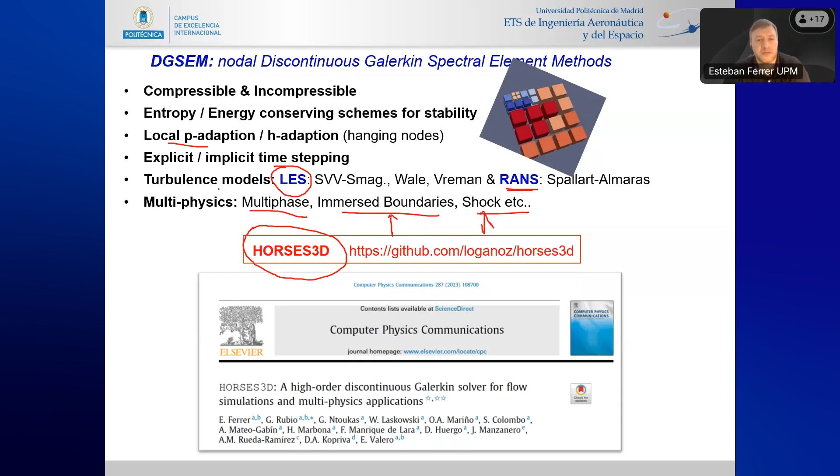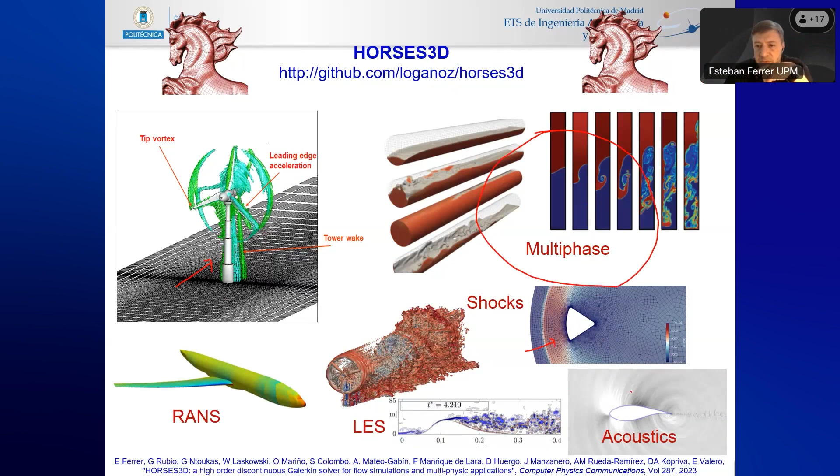Right, so in a nutshell, we can solve all this variety of problems, where here we have a wind turbine with immersed boundaries, I will talk a little bit about that later. We can do multiphase, but I'm not talking about that. We can do shocks, as in this Apollo capsule. We can do acoustics, very interesting acoustics these days, and in particular acoustics of wind turbines. Right, so I'll talk a little bit about that.

First, I will motivate the use of high-order methods. So in low-order methods, classic low-order methods, what you have is a mesh made here of triangles, for example, and then you will have a piecewise constant function inside the element to capture the solution. In finite elements, instead of a constant, you have a piecewise linear variation similar to that one inside each element, and that allows you to capture the solution. If you want to increase the resolution, you need to increase the number of elements to capture the gradient in the solution.

Now, in higher-order methods, and in particular in discontinuous Galerkin, we can do two things. We can increase the number of elements as in lower-order methods, the same idea—that's what we call h-refinement. Or what we can do is fix the mesh, fix the number of triangles, the number of quadrilaterals, and increase the polynomial order inside each element. So instead of using piecewise constant values or piecewise linear variations, we can use quadratic or cubic variations, or any arbitrary polynomial order inside each element. And this allows you to better capture the solution whilst keeping the same number of triangles. Now, one wonders why do one or the other, right?

Because if you increase the number of triangles or you increase the polynomial, what you're doing is better capturing the solution. I think everything can be seen in this very simple problem. This is a Poisson equation, so an elliptic problem. We have here the L2 error, since we know the exact solution, we can compute the error between our numerical solution and the exact solution. And here we have the number of degrees of freedom used to solve the problem, which relates to the size of the matrix we need to invert to get the solution.

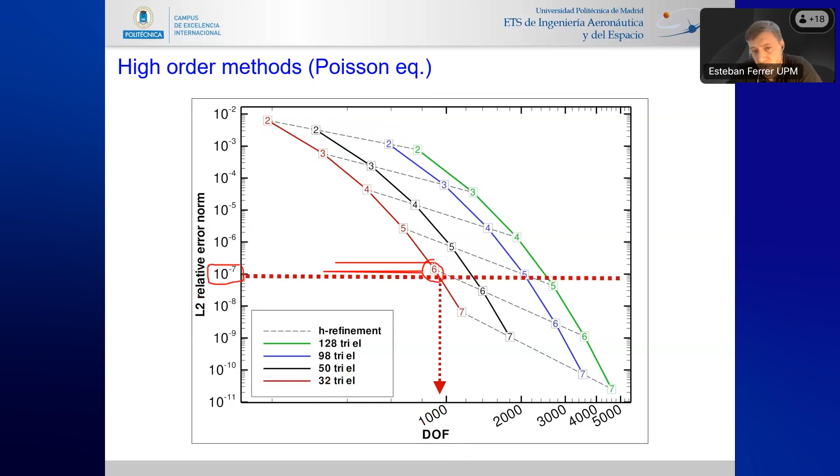So basically what we're saying is that if we are interested in a particular level of accuracy, let's say 10 to the minus 7, we can use a polynomial order 6 on a coarse mesh, and that leads to 1,000 degrees of freedom - that's the size of the matrix we need to invert - as opposed to if we use a low polynomial order, we are outside the screen, meaning a much larger matrix that we need to invert. Overall, there is a saving in memory and cost because we need to invert a smaller matrix for the same accuracy. That's the potential of higher order methods - it can be explained in this simple problem.

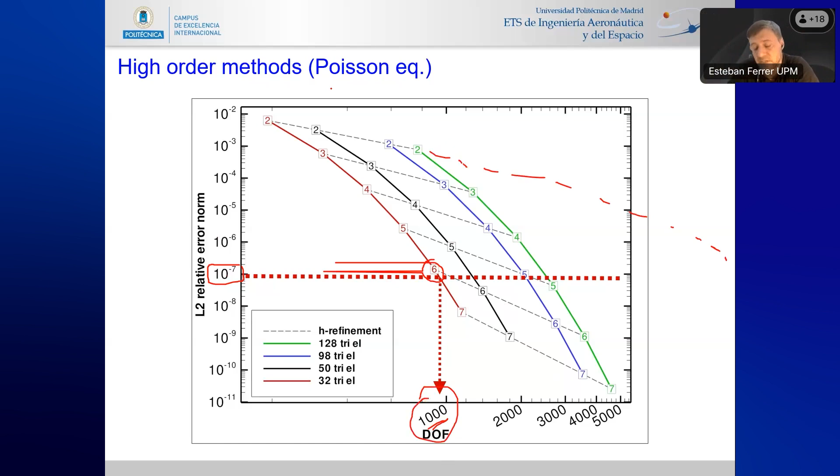Again, this is a Poisson equation, a very simple problem. So what happens if we go to more complex stuff? If we compare, for example, a higher order method, P5, on a very coarse mesh like this one, we see that we capture well the structure of the flow after an airfoil in this case. However, if we use a lower order solver - this is a finite volume solver, in particular Fluent - we see that we get dissipated structures very soon after the vortex shedding starts. This is due to numerical errors, and these relate to the lower accuracy for the low order solver. And this is on a much finer mesh than for the higher order solver.

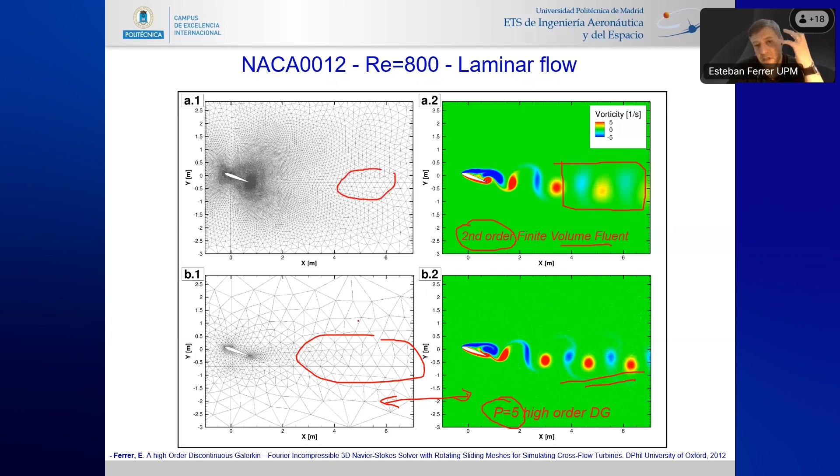So overall, when we go to practical applications, we do see the effect of this improved accuracy for high order polynomials. I have another example, which is even more complicated, and this is the acoustics emanating from the trailing edge of this airfoil. The acoustics in this case is complicated - you have to very well capture the boundary layer and the vortex shedding emanating here at the trailing edge. Those vortices interact with the shear layer here at the trailing edge, and there are some waves emanating and going up to the front.

So what we're measuring here is the acoustic pressure at this particular point. We need to well resolve the near boundary layer and also all the propagation of these waves throughout the space up to this point. If we do that and increase the polynomial order, what we see is what looks like a random signal. We're not sure if increasing the polynomial really makes sense.

But what we can do is take this signal and integrate it from 0 to 20, and then we can get an integrated value for the overall sound pressure level against the degrees of freedom. And what we recover is this very rapid decay of the error, very similar to what we were getting for the analytical elliptic problem, the very simple problem. This is much more complicated - we have generation of noise, we have propagation of noise.

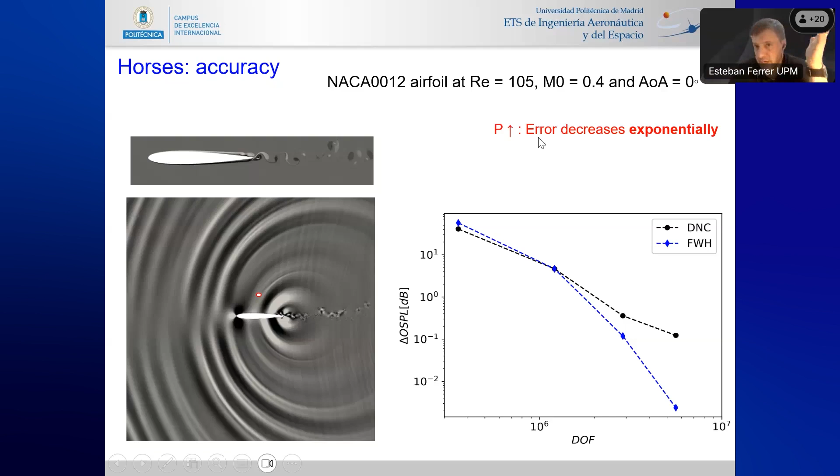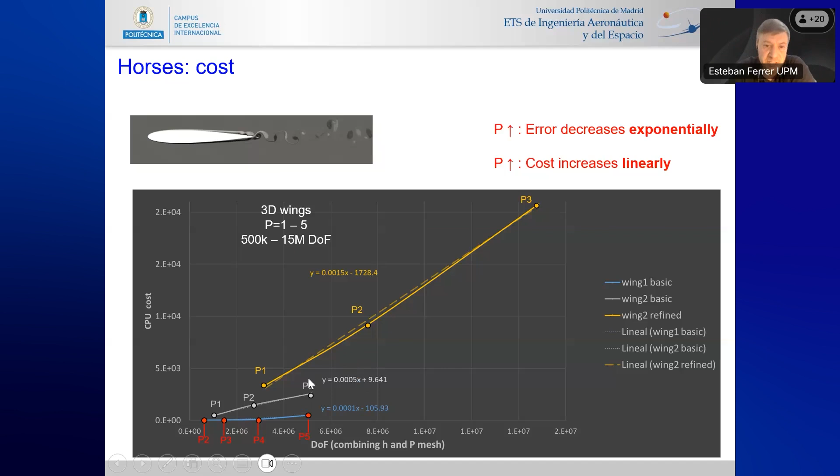Now, we have checked that in our solver. This is parallelized, with a few tricks to improve performance. What we see is that when we increase the polynomial, the cost increases linearly, roughly, not exponentially. So we get exponential decrease in error, but the cost only increases linearly, which makes it very advantageous to use high polynomial orders. So this is what we typically do. We use polynomial order 5, something like that.

Very recently we have ported the solver to GPUs. This is a first, it's on the way. We're trying with OpenACC to port that to GPUs. What we're seeing is that when we compare to 100 CPUs, on one GPU, an NVIDIA A100, not one of the very good ones, we get per iteration a reduced cost of 0.07 seconds.

One can play around with this number and say, okay, for an LES simulation it's not strange to have to run 10 to the 8 times that or something like that, which basically means you get 81 days faster computations with one GPU than with 100 CPUs. So we are happy, and we keep improving this. We have more ideas on how to keep improving this. We're doing it.

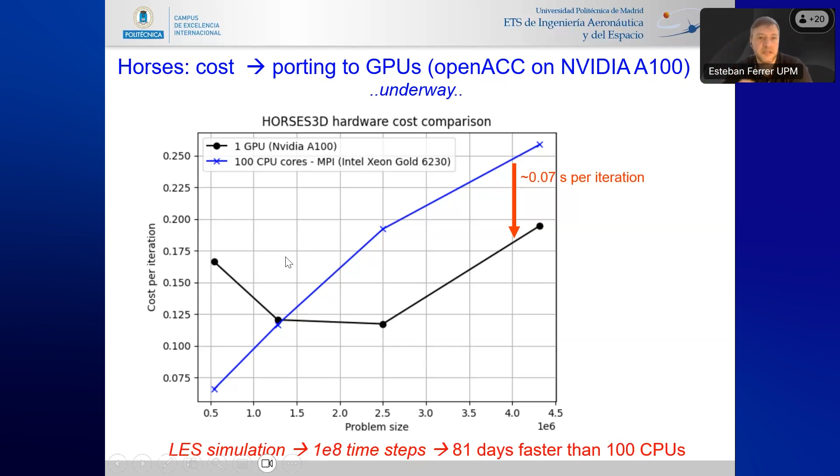We have coupled in the past Horses to MFEM, to other solvers, in particular MFEM. I have here a couple of snapshots of what we've done, to get the conversation going with you guys. One thing we have done in the past is solve the fluid with Horses and solve the thermal part of the problem, which is this capsule Apollo, with MFEM, coupling the two-way coupling of the temperature from one to the other.

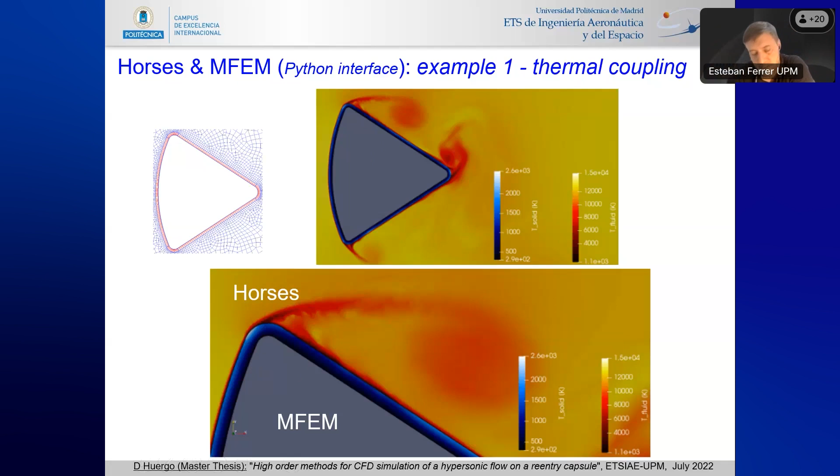A second example of things we have done in the past is solving incompressible flow, so we developed an incompressible solver where we need to solve a Poisson equation and a Helmholtz equation. This is one of the splitting methods to solve the incompressible Navier-Stokes equations. For some parts we use MFEM because we don't have a CG, a continuous Galerkin solver—we only have the DG and flux reconstruction versions. So some parts we use CG with MFEM and some parts we use DG. This we did in a PhD thesis of one of my students a while back.

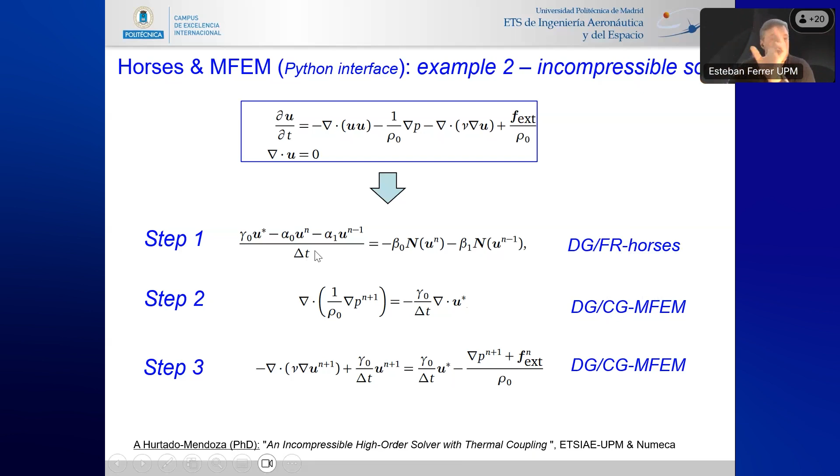So I think we have done that in the past, we know how to do it, and I think that allows us to think of interesting ideas of solving different parts of problems with MFEM or Horses.

Let me go into some of the physics we are developing or including in the solver these days. We're very interested—this is related to an ERC grant that I got recently—in a lot of wind turbine simulations. So we do simulations with immersed boundaries, with actuator lines, and also looking at the interactions of one wake with another, with another wind turbine. All these things are in development now.

If you want to model or simulate wind turbines, there are different ways of doing it. You can use actuator disks, actuator lines, immersed boundaries, and sliding meshes. We are working on all of those. Actuator disks are very easy, just a pressure jump in your simulation, so I'm not going to talk about that—that's too easy. I'm going to talk a little bit about some recent developments on actuator lines, immersed boundaries, and sliding meshes.

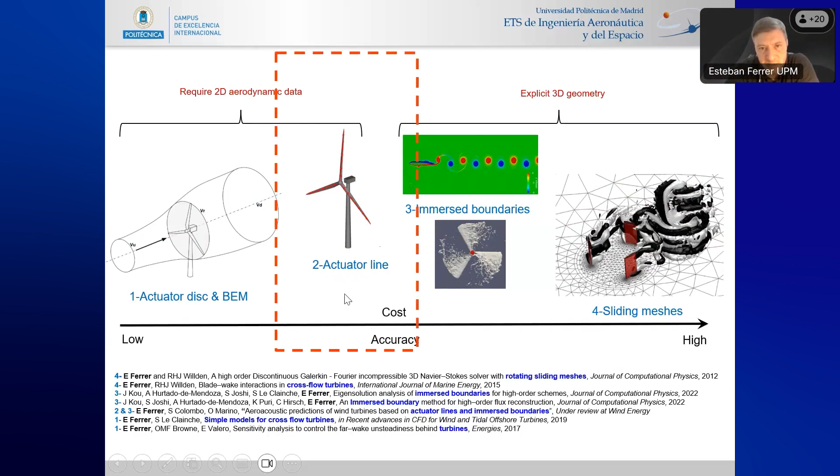Let me start with actuator lines. It's a very neat idea, right? What you do is get a simulation of two-dimensional airfoils, or you can get it from XFOIL or whatever—you only need the lift and drag coefficients on this. Then you get formulas using the velocity in your CFD flow field to calculate the forces, and the forces are calculated for each section of your blade, and then you can add this forcing into your simulation. So you don't need to simulate the whole geometry, you only add a force, a point with a force, with the lift and drag in the direction needed.

What you do is you smooth these forcings to avoid a sudden peak that would blow up the solution. So you use a Gaussian to smear this force, and then you can do the smearing and everything in high order.

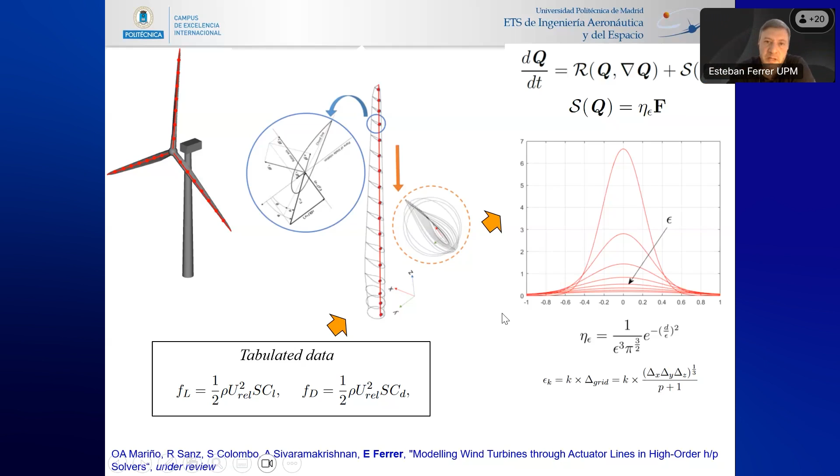Now, of course, these actuator line ideas were all developed for low order methods, for finite volumes in particular. So this is an example of the things you need to think of when you adapt things from low order to higher order. The way this works: you have the lift and drag, you get the u velocity squared, this one here, you take it from the CFD simulation, and with this you compute the overall force.

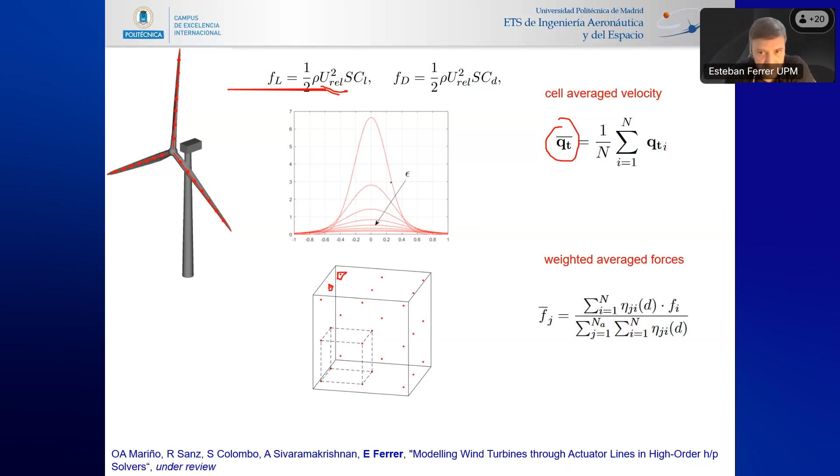We tested both. What we observe is when we do cell averaging or weighted average for low polynomial orders, we get almost exactly the same flow fields—nothing in particular stands out. Of course, that's low order, so it makes sense they're similar. Now, when we go to high order, P5, we see different physics. With the cell averaging, we're changing the physics, getting these long wavelength oscillations that we don't get with the weighted average, and don't get with very fine finite volume simulations. So the message here is one has to be careful when adapting things from low order to high order, because it doesn't always work. Sometimes you have to rethink things.

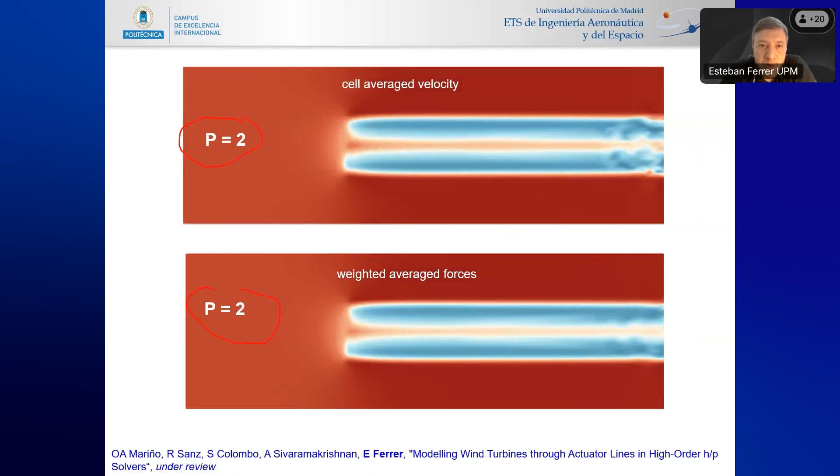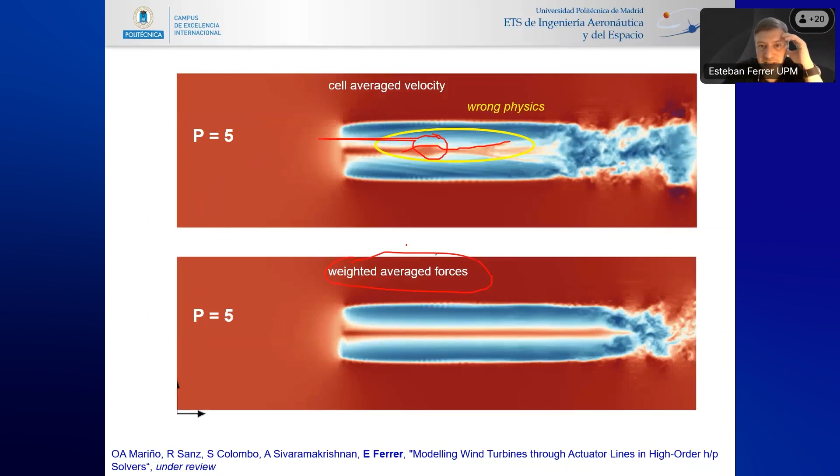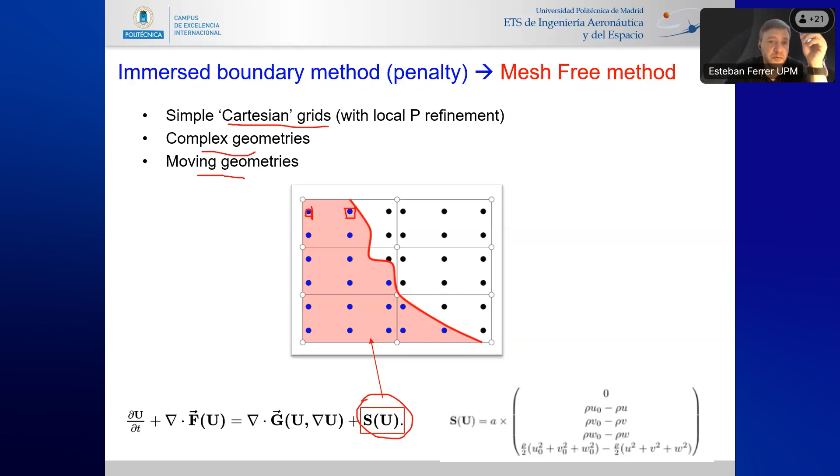So this is one possibility. The second possibility is to use immersed boundaries. What are immersed boundaries? You have a mesh, a Cartesian-like mesh, something very simple, and you modify your Navier-Stokes equations to add a penalization term that drives the u velocity to zero at all the Gauss points inside your body, mimicking the effect of having a body. The nice thing about this is you can use a Cartesian grid—you don't need to body-fit your mesh. You can have complex geometries and moving geometries very easily. And again, from a CFD practitioner's view, no meshing is very nice. I don't think anybody likes meshing.

So, well, this is what we get. We can move things around very easily, and we get quite the right results.

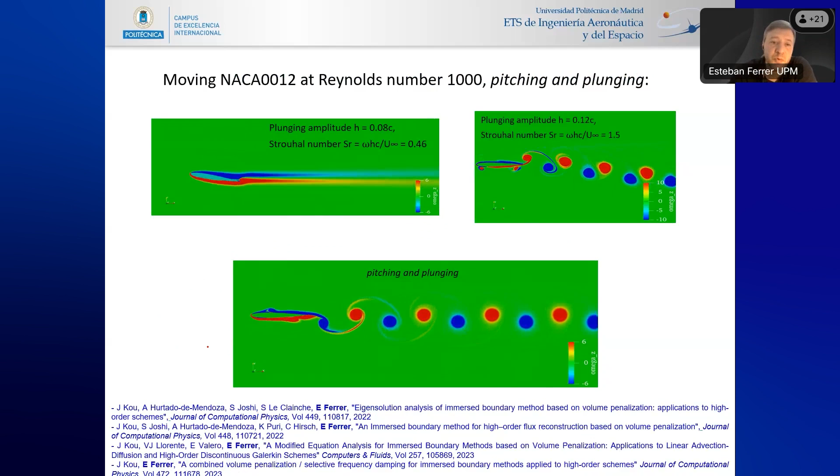For these cases as well, there's a bunch of papers that we developed here a couple of years back, where we analyze the errors and how we can improve the method. One of the interesting things we found is that when you increase the polynomial, you do get better solutions, this kind of exponential convergence, this very rapid decay of the error, which was not obvious because of this way of imposing the boundary conditions. But it can be done.

And we've recently developed a high-order version of the immersed boundary as well, which can achieve this very high convergence.

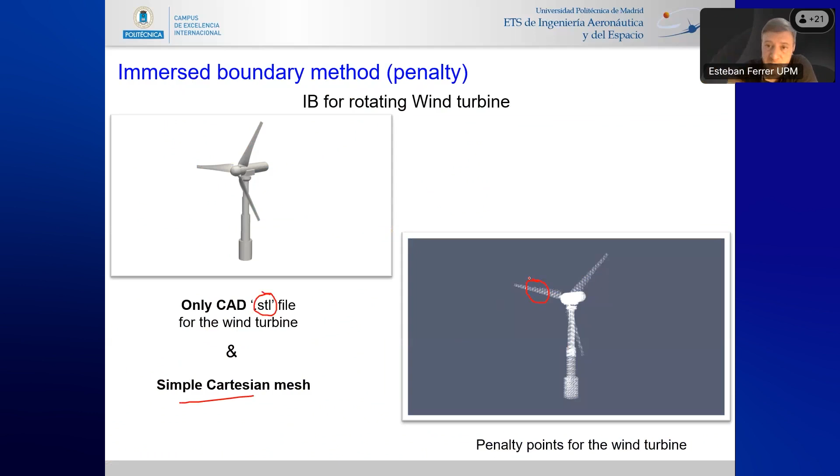Right, so having that, we can do wind turbines as well. For this, we use only the STL and a very simple Cartesian mesh. The solver defines all the points that need to be penalized, all the points inside the body, where you need to add this additional source term. And then we can run this kind of simulation.

Here, for example, in the wake I use a high polynomial order, and in the far field a low polynomial order. What we see is that, of course, there's no solid shown because there's no solid. But we can always overlay the CAD file to see that we're getting things right.

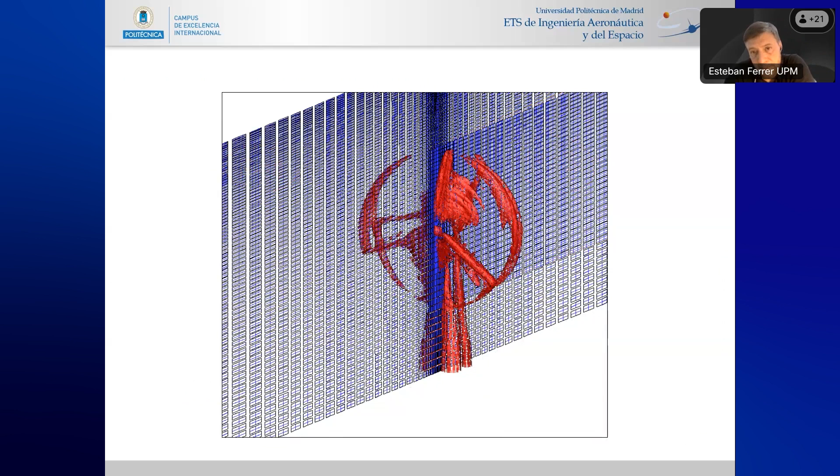So in this case, the blades are rotating, and what we see is that the right physics come through. We get the tip vortex, we get the leading edge acceleration of the blade, we get the tower, we get everything. Typically what we do these days is use actuator lines for the blades because it's cheaper.

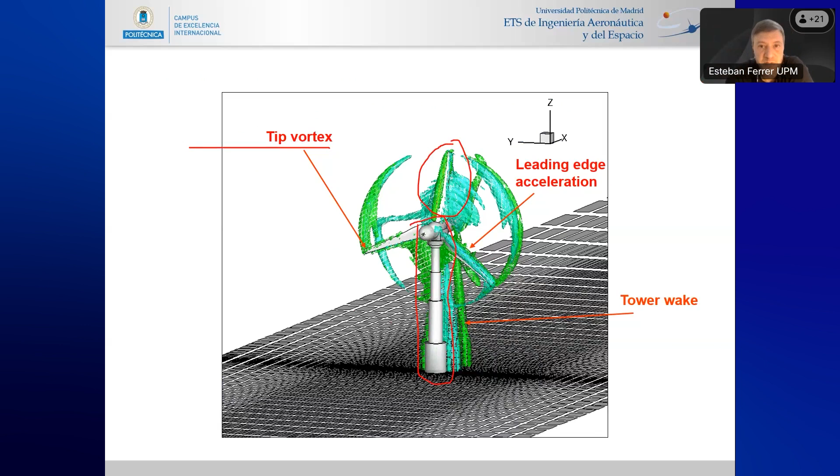And then we use immersed boundaries for all these things. But we also sometimes move things around and get these with immersed boundaries. And finally, the final possibility is to use sliding meshes.

Basically, sliding meshes with high order was part of my PhD back in the days. Here you can see that the inner mesh rotates, the outer mesh is static, and you get a sliding interface. The interesting thing is that the contours go through the interface and they don't care there's any interface, right? They just don't get affected.

There's no spurious oscillations or anything, and you can ensure that by doing over-integration when you have high order methods. This is a bit more costly than the previous ones, but it can be done. We have done it, and we're now implementing it in HORSES3D as well. It's not there yet, but it'll be there soon.

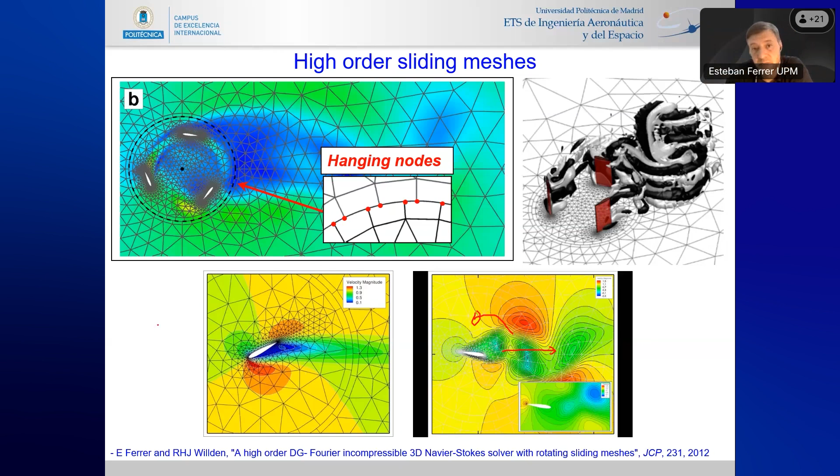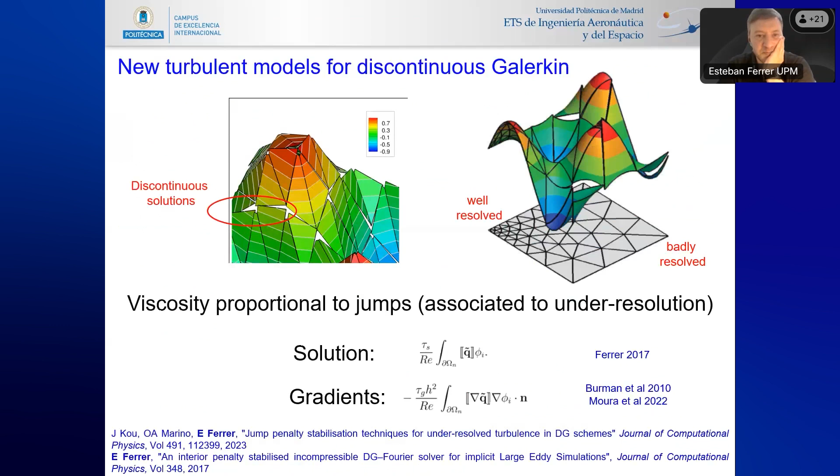I think I'm going to skip a little bit the turbulence part, because otherwise I'm going to run out of time, and I'm going to talk about the machine learning ideas. So let me just skip that part and go into the machine learning.

So things that we're doing in machine learning, we're trying to couple what I call AI-based CFD. The idea is to get some of the features of AI and try to improve the CFD simulation. We've been thinking, and we believe there are three things that can be improved: the efficiency of the solvers, the accuracy, and also automation of the CFD.

So for automation, David is going to be talking about reinforcement learning. We can automate some of the things we typically do by hand with CFD. Efficiency and accuracy, I'm going to be talking about a little bit now.

Right, so one of the things one can do regarding accuracy and efficiency is to try to use the high polynomial order only in the regions that are needed. Typically feature-based sensors for adaptation to improve the solution require some threshold.

For example, if we use the eddy viscosity sensor, which takes into account the whole turbulence of the flow, you need to set a threshold, like with contours. When you plot contours in ParaView or in TecPlot, you need to set a threshold for plotting. And this threshold makes the region vary a lot.

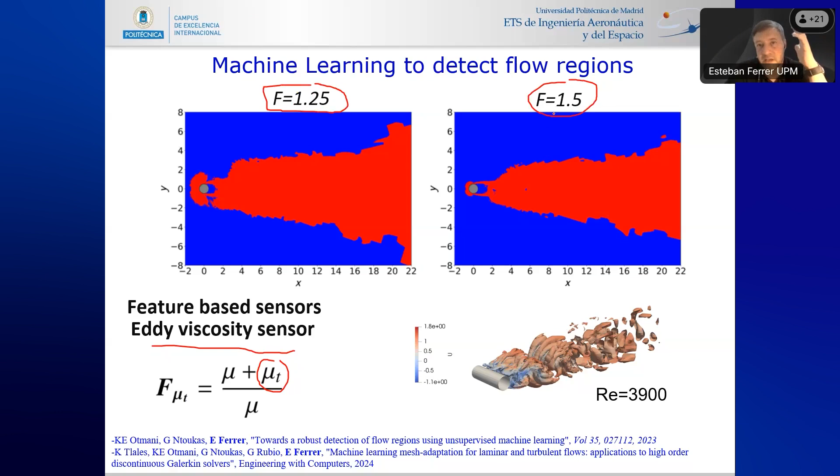So if you use 1.25, you get this red region. If you change the threshold to 1.5, you get this other region. So this is not ideal, because using high polynomial order or not will depend a lot on this threshold, which is arbitrary.

So what we have done, it's very sensitive to the threshold value, right? And also it's difficult to get mixed regions. So here you have this blue region that probably you want to adapt because it's in the wake of the cylinder, but it will be missed with this eddy viscosity sensor. This is a laminar region. There's no turbulence here, right?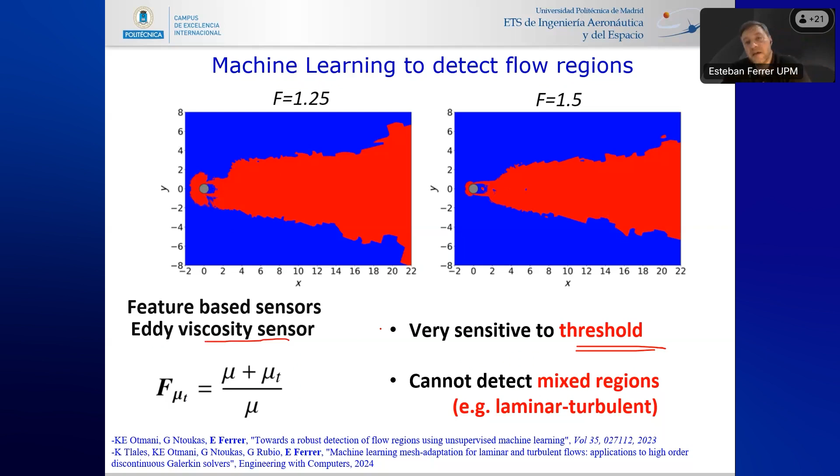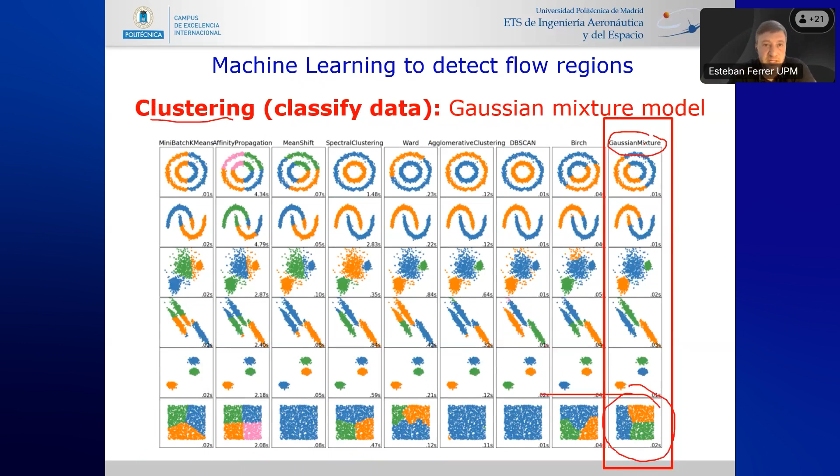So we weren't really happy with this feature-based approach, so we tried to use clustering. Clustering allows you to detect regions in your flow, and in particular we use Gaussian mixture models. There's a bunch of different ways of doing it, we use that one. If you use the right feature space, for example vorticity and strain rate, you throw that into a clustering algorithm, which is a machine learning based idea. You tell it give me 2 clusters only, and it will give you these 2 clusters, right? So one cluster where there is a lot of strain rate and rotational stuff going on, and one where there is almost nothing.

The important thing is there's no thresholds. You tell it two clusters, it gives you 2 clusters. So we can check if what we're doing is right. For example, we check the cluster-based adaptation from P4 to P2, and we compare that to a uniform refinement of P4, and we see that the values are almost identical. So we are getting almost exactly the same solution for this turbulent flow field in the wake, but with a reduction in cost of 33%, a 40% reduction on degrees of freedom.

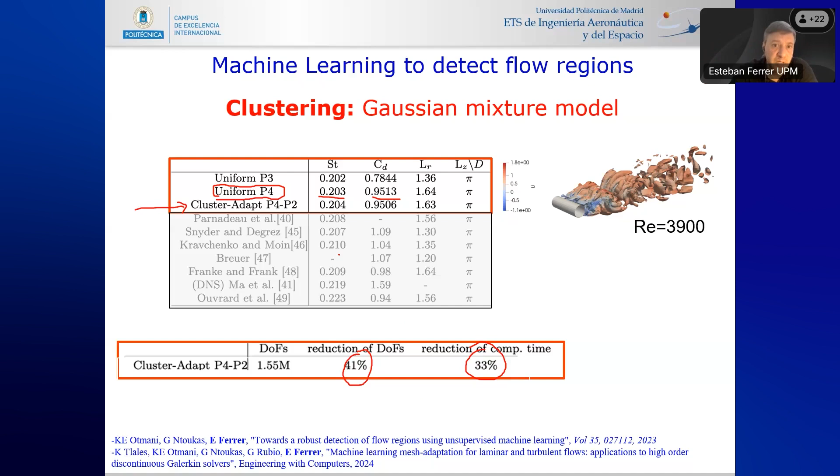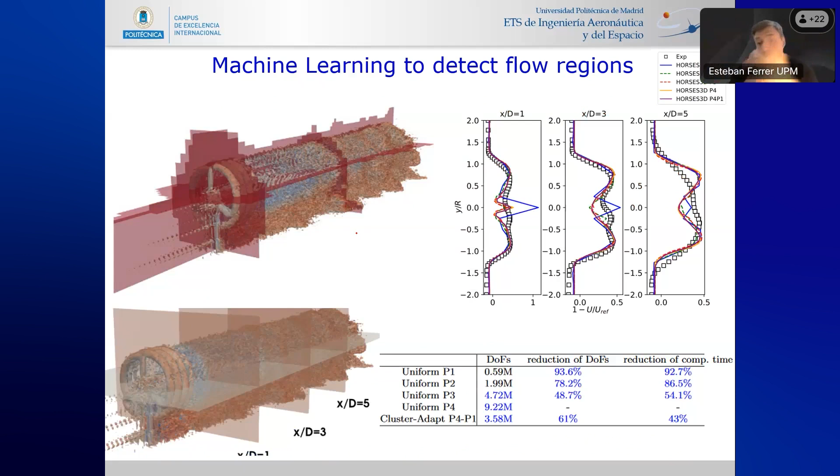So we have tried this idea for incompressible light flows, so very low Mach turbulent flows, and wind turbines as well. We get very similar results. The idea is with these 2 clusters, what we do is we get the interesting part of the wake. We have various papers showing that.

We have applied this technique also to shocks, because with this method we can do shocks. What we see is that if we use feature-based detection, again we change the threshold, and to capture the shocks it changes a lot the definition of these shocks with the threshold. However, when we use the GMM, the Gaussian mixture model, what we see is no tuning, there's no thresholds, and we get the shocks quite all right.

So if things evolve with time, we can do the clustering every so often, reinitializing from the old one, so it's not that costly, and then we get good tracking of the shocks. All these ideas came out in a few papers. We have 1, 2, 3, 4 papers on these techniques, and we think it's reasonable.

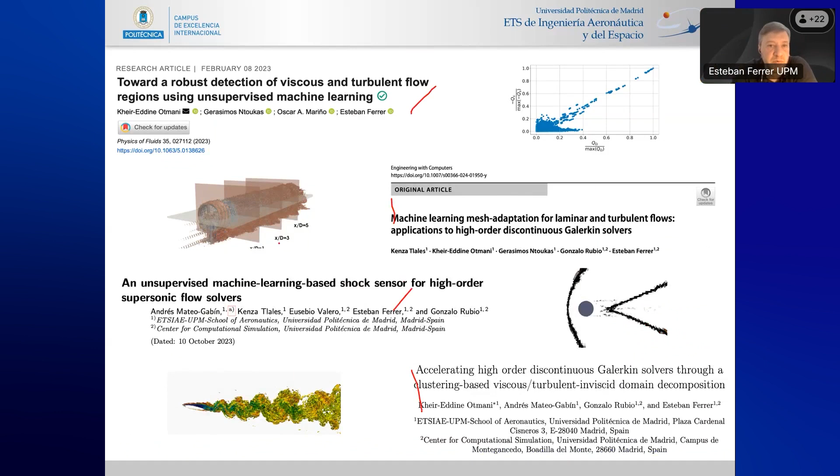David will talk about using reinforcement learning for adaptation, which is a different idea, and he will talk about that in about 5 minutes. So I think I still have 5 minutes, and in this 5 minutes I would like to show you a little bit of another crazy idea of using high order with machine learning.

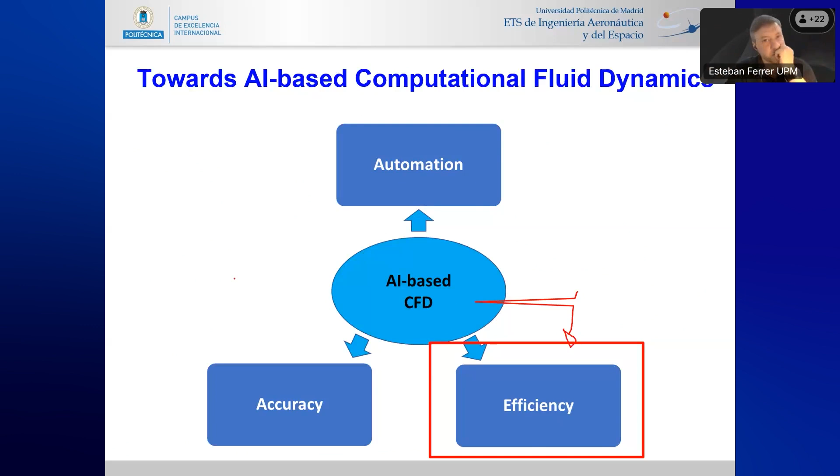This looks into the efficiency of the solvers, trying to accelerate the solver without losing accuracy. If we think of low order methods, low order polynomials, and high order polynomials, one of the things that happens is that with low order methods you can use very large time steps. But with high order, because of the CFL condition that links space and time, you need to use smaller time steps.

So basically the solution advances very accurately, but very slowly. Wouldn't it be nice if we could run a low order polynomial, so a very badly resolved simulation, and every so often or every time step correct it such that we get the same solution as the filtered high order solution? That's the basic idea.

So if you want to pose that problem, what you do is you write the evolution equation for the low order problem, you write the evolution equation for the filtered high order, and those are completely different, of course. This one is okay, it's accurate. This one is completely crap. And you think about what's missing here for one to match the other.

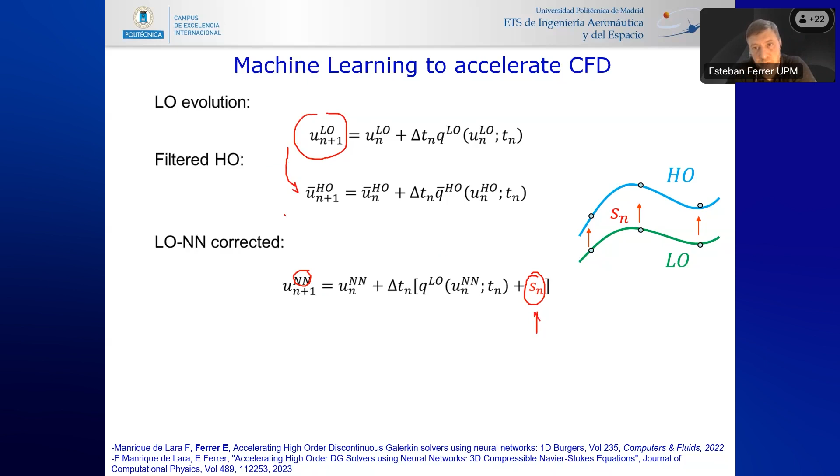So then you can think of different ways of doing it, but the way we thought is adding a source term here to the low order equation that now we call the neural network equation. We'll soon see why. Where we correct the low order solution, which is crap, to get the filtered high order solution. And we do that for every single Gauss point in our mesh, so they all get corrected with different S_N. So where does this S_N come from? Well, we call it neural network, so obviously it comes from a neural network, right?

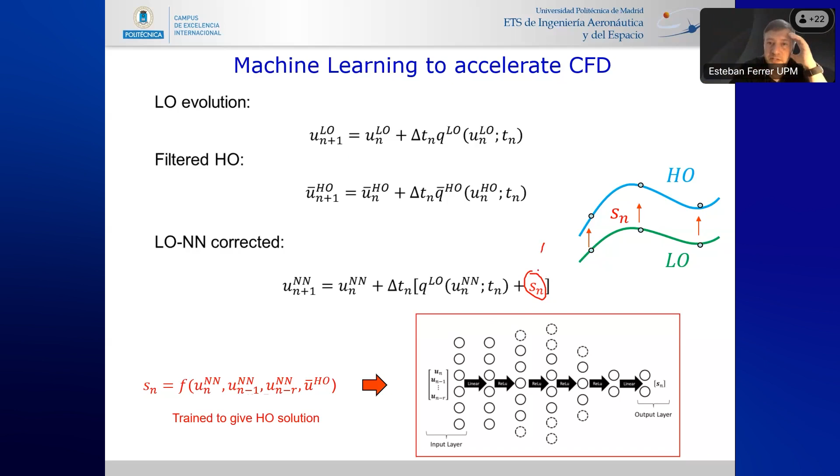So what we're going to do is train a network to get us this correcting forcing term, based on some training window. During some time, we're going to train with high order solutions to get us this source term, SN. And after this window, we're going to forget about the high order solution and keep correcting the solution with this SN.

To check this idea, we did it first. We postulated this idea in 1D for Burgers' equation, very simple. We had a paper in Computers and Fluids on that. And later we used it in 3D for turbulent flows in a JCP paper.

That was my bad idea, to use the Taylor-Green vortex to start with this, because I didn't realize at the time how complex the physics is, much more than one could think. Of course it's a box with periodic boundary conditions, which seems simple, but physically it's not. You have a laminar flow, a transitional flow, and a turbulent flow, and everything happens in this box.

So when you try to guess things, you have various regimes and they are not the same. What we did is take a very small training window like this. We run a p8 solution and a p3 solution - the low order p3 solution runs 3 times faster than the p8. We train in this window, and then we keep correcting with the source term we obtained after the training.

And this is what happens. We can check the difference between the p8 solution, the filtered p8 solution - that's the good one - minus the original p3 solution, that's the bad one. And we get this curve here. So that's the one to beat.

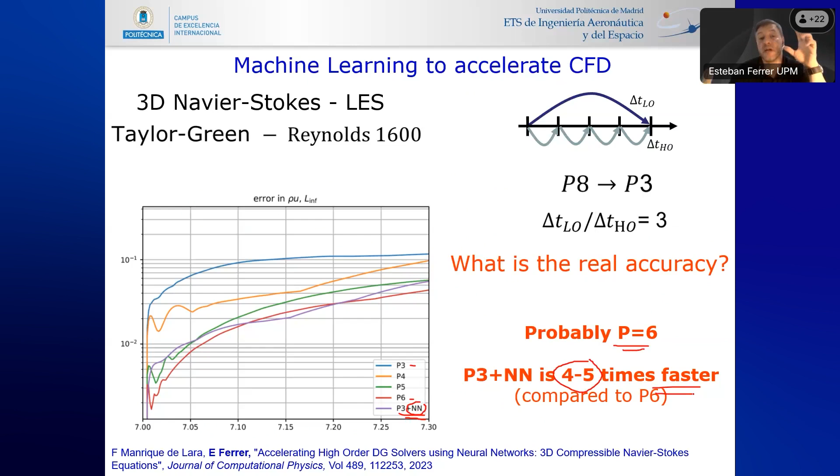So to see what actual polynomial order we are getting, what's the real accuracy of the p3 plus neural network, we can run a bunch of different simulations from p3 to p6 and compare against the p3 plus neural network. What we see is that more or less we get a p5, p6 solution. Now, if we compare the p3 plus neural network, with training and everything, to the p6 solution, we get a 4 to 5 times faster solution. So we are indeed improving the efficiency of the solver by mixing with this.

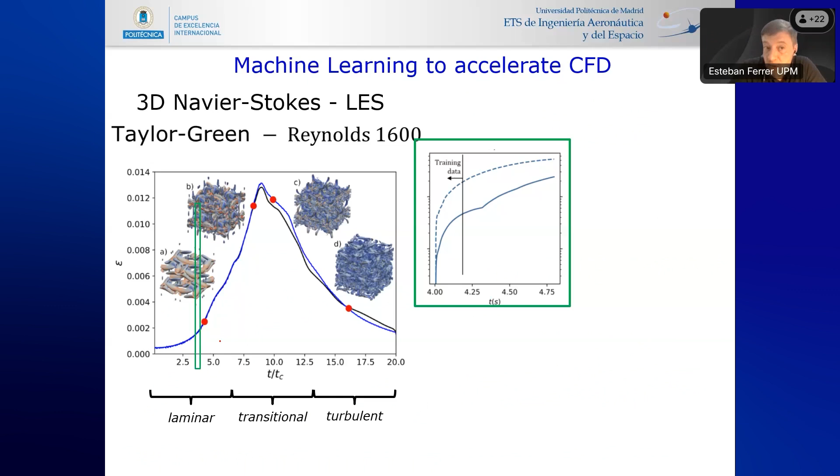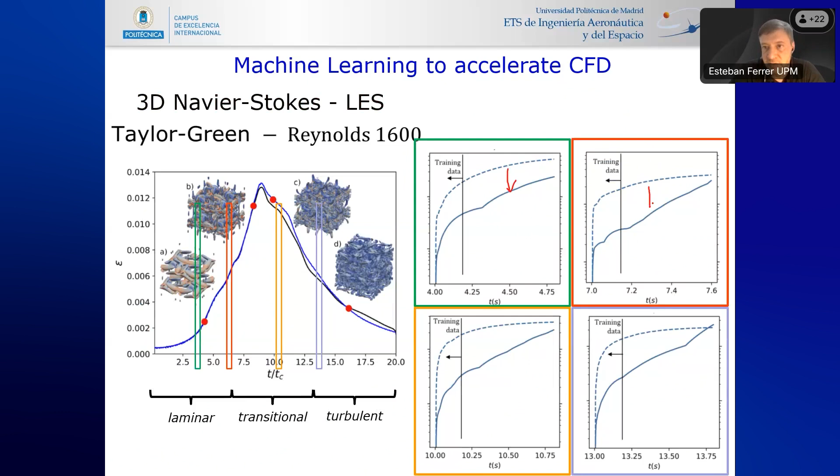Finally, I'm almost there. We tried for one particular window - that was laminar transitional, or laminar complex, I would say. So we tried for different flow regimes: laminar, transitional, turbulent, and more turbulent. What we see is there's always improvement. So the method kind of works all the time, doesn't matter if it's laminar or turbulent regime. It works better or worse depending on the regime, but it always gives you some improvement.

But more recently, we have tried different neural networks - fully connected, CNNs and LSTMs - and we can get some additional improvement over what I just showed. So there's room for improvement. It's not super massive, but you get some improvements.

And with that, I go to the last part, which is going to be automation of the CFD, and this is going to be explained by David. So the idea here is to use reinforcement learning, which allows you to automate processes or play games and win, like Go, chess, Atari, etc.

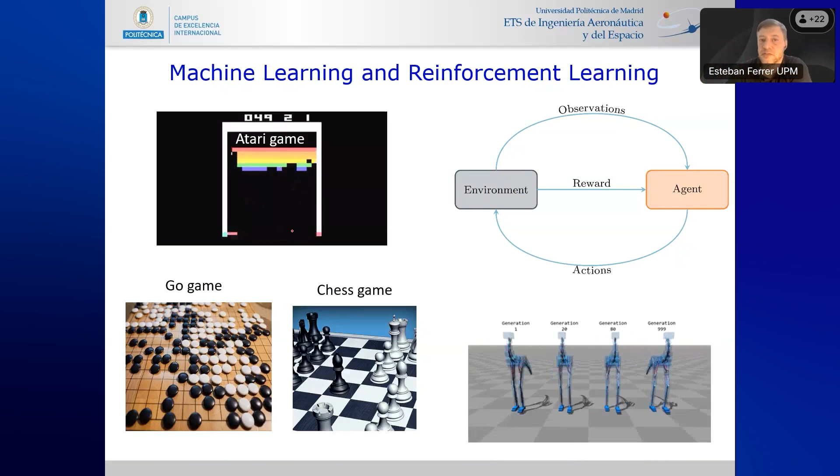So now our game is the CFD simulation, and we're going to compete with some reinforcement learning stuff. David's going to be talking about that. Let me just show you something that I think is not going to be covered by David, who's going to be talking about adaptation.

Another thing we've been doing recently is getting the right parameters for multigrid. In multigrid, you have a bunch of different parameters. If you have a student trying to run simulations with multigrid, when the advection speed changes, in 1D, or the viscosity changes, the parameters in the multigrid change a lot. This includes the sweeps and the relaxation between levels that you use. You have to fine tune this, and it drives your student completely crazy trying to tune these things.

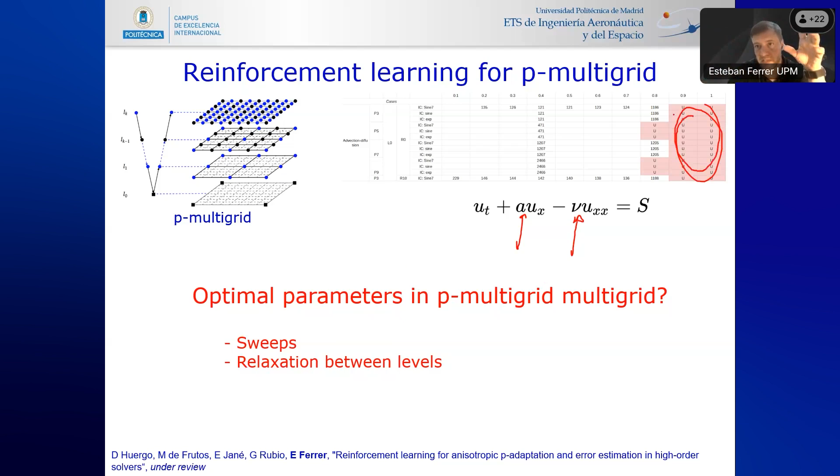And sometimes it blows up. Depending on the parameters you use, it either blows up or it works. So these are what my students did.

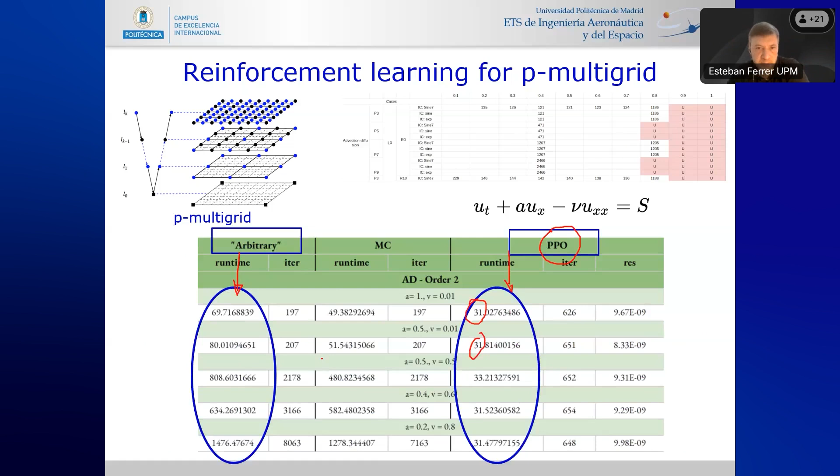So that's very promising. And now I'll leave the room to David, who's going to be talking about reinforcement learning for p-adaptation.

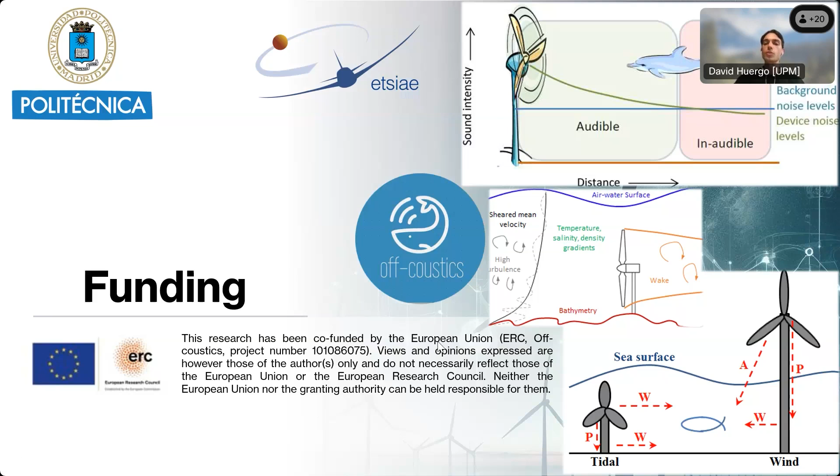So first of all, what is p-adaptation within discontinuous Galerkin solvers? DGSEM, as Esteban said before, is a finite element method in which we can approximate the solution inside each element of our mesh using Lagrange polynomials. These polynomials are based on Legendre-Gauss nodes, and of course the solution can be discontinuous between elements.

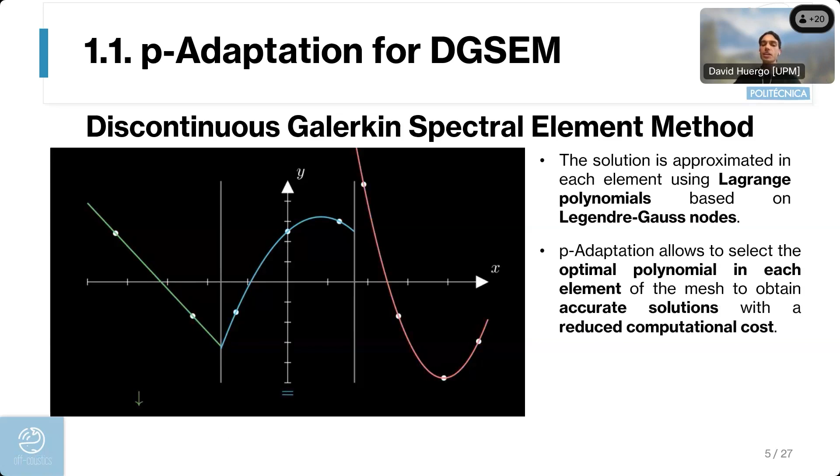Within this framework, the use of p-adaptation allows us to select the optimum polynomial order inside each element of the mesh so that we can obtain accurate solutions in those regions of interest, but also reduce the overall computational cost. So the idea behind p-adaptation is very interesting, but we cannot do it manually because selecting the polynomial manually is highly time consuming. So we want to do p-adaptation, but we want to do it automatically.

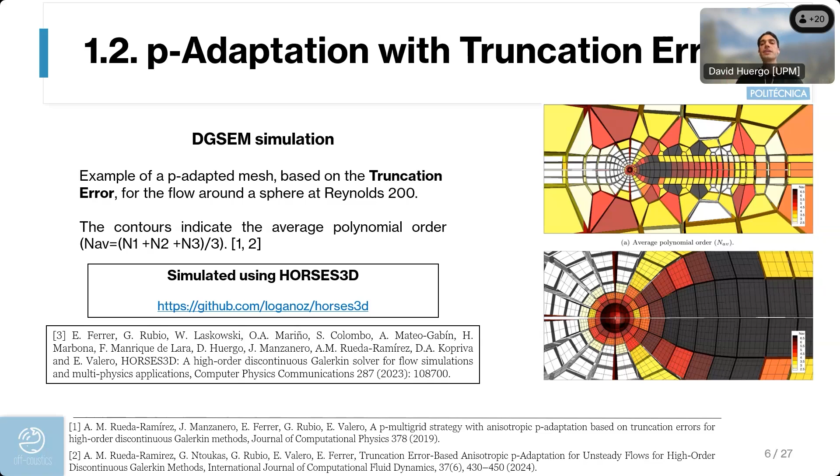In our research group, we started with p-adaptation using the truncation error as a measurement to decide where to increase or decrease the polynomial order. We implemented this strategy in our solver, the one that Esteban told you about, and we discovered that p-adaptation allows us to drastically reduce the number of degrees of freedom, giving a huge speed up. The problem with this approach is that computing the truncation error itself is highly time consuming. So we want to use p-adaptation because it has lots of advantages, but we want to use reinforcement learning to speed up the code because the truncation error approach is not as good as we expected.

So how can we use reinforcement learning for p-adaptation? Within the reinforcement learning framework, there are two main blocks. The first one is the environment, that is the problem that we want to solve. In this case, the environment is our discontinuous Galerkin solver, the solver that we will use to solve our equations. And the other major block is the agent, the brain behind the reinforcement learning.

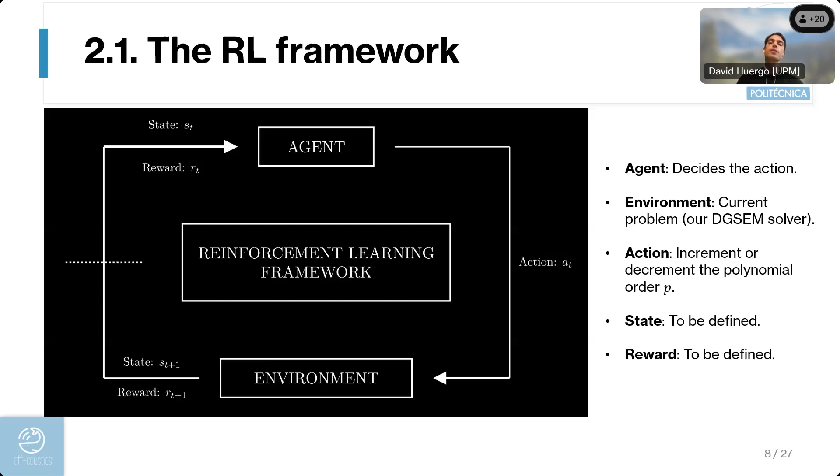The agent will receive information from the environment, that is what we call the state. And then the agent will generate an action. In this case, the actions are going to be to increase or decrease the polynomial order inside each element so that we have that p-adaptation. And finally, we need to define a reward function to tell the agent during training if it's performing well or not. So the first thing that we must define is the state.

This is the most important part. And to define a good state, we must ask ourselves what we need to know to adapt correctly the polynomial order inside each element. In this case, it's quite simple. We just need the flow field, the solution of our variables evaluated at the Gauss nodes. So that's our state. But of course, the size of the state is going to depend on the polynomial order that we use, so in different elements we may have states with different sizes.

Then we have to define the reward function. The reward function is the objective function that we want to maximize. But for this problem, we have two opposing objectives, and we must find a trade-off. First, we want to minimize the polynomial order, because that means we are able to minimize the number of degrees of freedom and reduce the computational cost. But also, we want highly accurate solvers. We want to use high order in those regions of interest, where we expect to have a strong gradient. So with that in mind, this is the definition of the reward that we have defined.

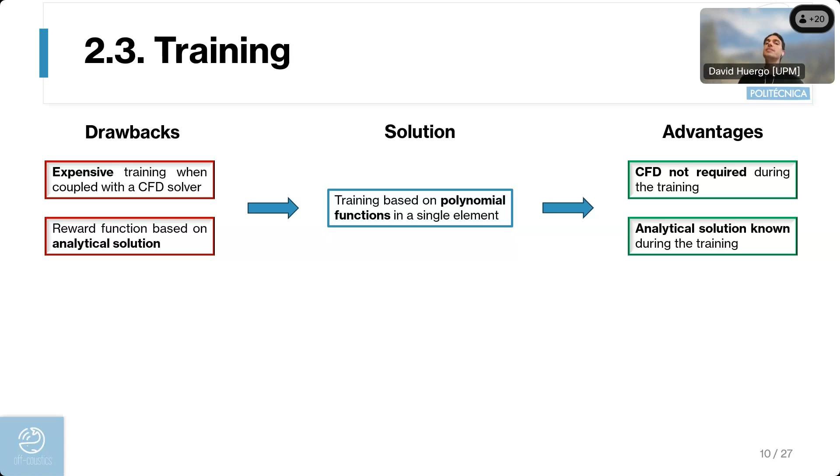So to solve both problems at once, we are going to train the agent based on polynomial functions that we define, and that's going to be our reference solution used to train the agent. Doing that, the CFD code is not required during training, so we are able to decouple the CFD code and the training of the agent. That means the training is going to be very, very fast. And also, we know the analytical solution because, in fact, we are creating the analytical solution, those polynomial functions.

The resulting agent has to be trained only once and for all. In fact, keep in mind that all the results I'm going to show you are all computed with the same agent. We have only trained one agent, and it's valid for everything. It can be potentially applied to any partial differential equation if solved with a discontinuous Galerkin solver, and you can use it on an arbitrary mesh, because the agent is going to select the optimum polynomial order in each element individually.

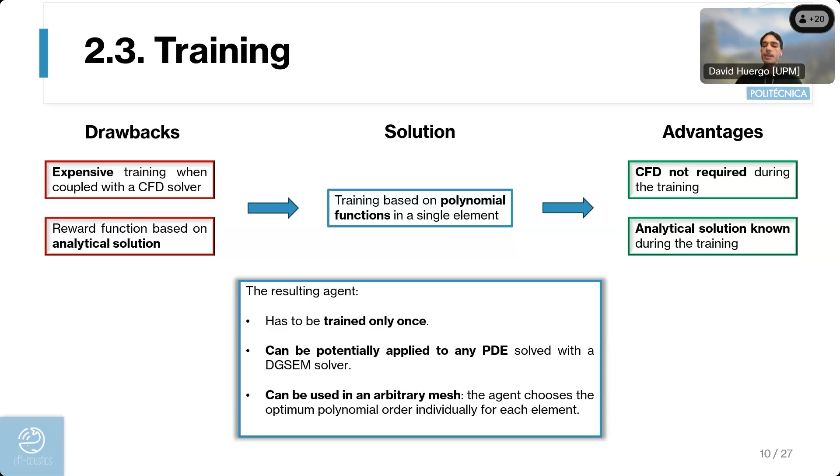Well, maybe you think that all this explanation of the training is a little bit abstract, so let me show you a brief animation just to clarify how this training works. Imagine that we have an element, and inside you have 4 Gauss nodes.

You may think there's an infinite possible amount of polynomial functions that go through all those points. So if we need a reference solution, the simplest approach is to fit those points with a polynomial P3, because there's only one. But maybe those points are representing a low-order polynomial. Maybe the real solution is a P2 polynomial. Of course, in this case, we should check that the error between the low-order and the high-order polynomial is small enough to make sure that the P2 polynomial is feasible to represent those points. But it could also be the case that the real solution comes from a higher polynomial, for example, P4.

So during the training, we will provide the agent this set of positions for the Gauss nodes, and the agent will have to face all these different scenarios. That way, the agent will be able to learn that for the same set of Gauss nodes, there are several, in fact infinite, possible polynomial functions that could be the real solution when we are trying to solve a real problem. So given that information, the agent, based on these probabilities, will try to select the optimum polynomial order to minimize the risk or to maximize the benefit that we may obtain, even though we don't know which is the real solution of our problem.

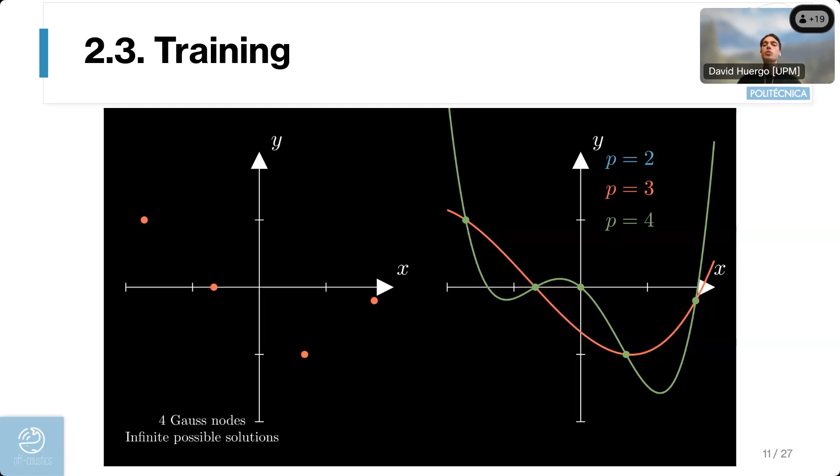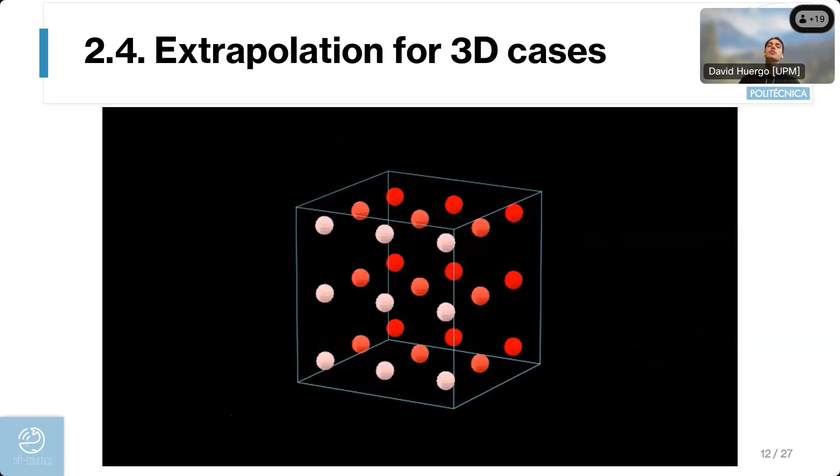And finally, as you have seen, all this explanation is based on one-dimensional problems. But what if we want to use the same methodology for two-dimensional or even three-dimensional problems? In that case, imagine we have a mesh made of hexahedra, and let's focus on a single element. Inside that element, we have a set of Gauss nodes. So let's pick each row or column inside that element, and that's going to be the state for our agent. And let's repeat the same operation for every row or column of nodes.

With all that information, the agent is able to provide an action. But if we do the same for the 3 different axes, X, Y, and Z, we obtain 3 different actions. That's why our algorithm is anisotropic, because inside the same element we may have 3 different polynomial orders, and in fact our agent is able to select 3 different optimums based on this approach.

Also, we have the reward function that we defined before. We have the discount factor that represents how important the long term is versus the short term. And finally, we have a probability transition function that is used in stochastic problems, because from the same state S, there's a probability of reaching a different number of future states S prime.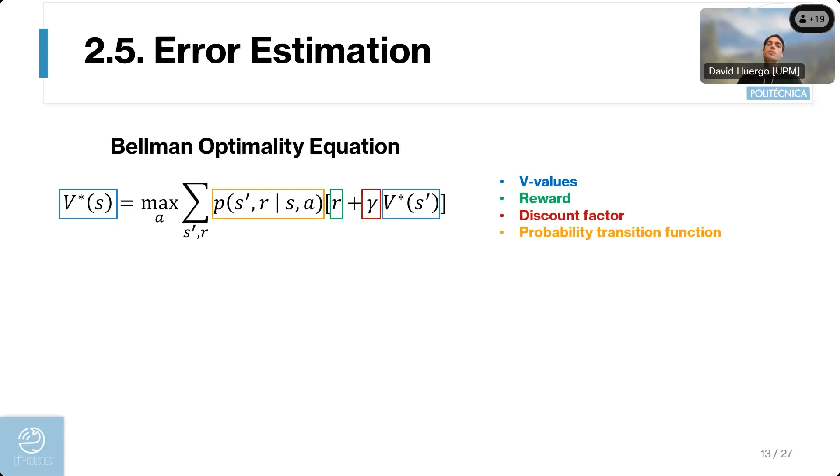So during the training, we are using a classical reinforcement learning algorithm called value iteration. And during the training, we are able to compute all these variables for every possible situation or scenario that you may find in a real problem. So we know all these variables, and after some rearrangement and some math, we end with this formula. This formula is the one that we use for the error estimation.

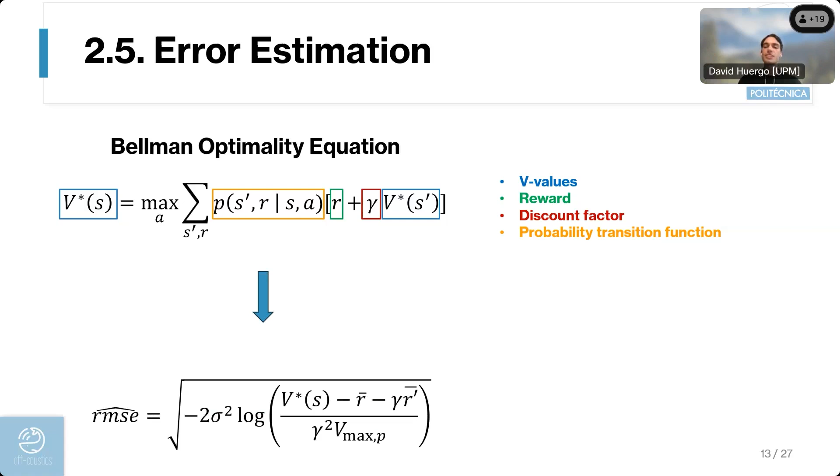The good point about this is that all the variables inside the equation are known during the training. In fact, we are able to compute during the training an error estimation for every possible situation that you may find in the future. So once you are running a real problem and you want an estimation of your error, you only need to look at the values that you computed before. So the error estimation is very, very cheap, so cheap that it's free. The computational cost is 0.

This error estimation provides the spatial error. The temporal error has nothing to do with this, only the spatial error, but it's the error that the agent believes to be real. It doesn't mean that it's the real error, but it's the error that the agent believes to be real, and as I said before, it's learned during the training. Of course, the agent doesn't know anything about what equation you are trying to solve, or what variables you are trying to estimate, or what are the boundary conditions. So this is only an estimation.

But we have discovered that though you can use this estimation without p-adaptation, if you couple both, p-adaptation and error estimation, the accuracy of the estimation is much higher.

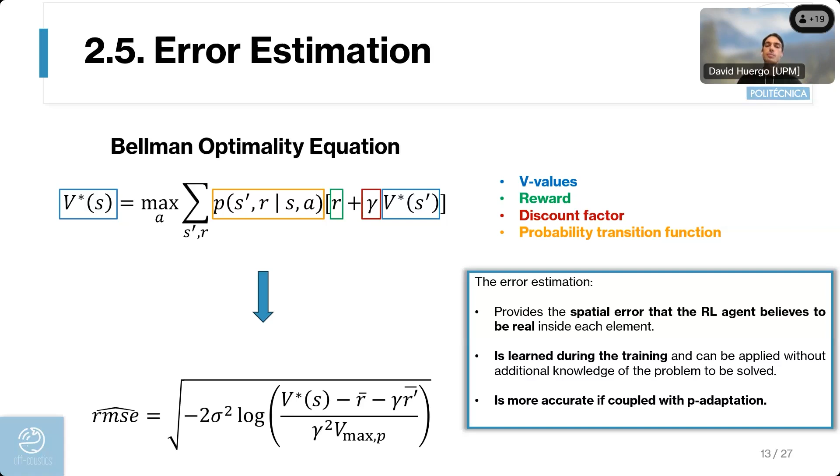So I recommend using both at once, p-adaptation and the error estimator. And finally, I want to show you some results that we have obtained with this methodology.

And of course, if you want even more accuracy at the cost of more computational time, you can tune the parameters of the reward function to obtain an agent that fits your needs.

Also, we tried with a cylinder at Reynolds 200, and on the right, you have a snapshot of the average polynomial order in each element, where dark colors mean high polynomial orders, and light colors mean low polynomial orders. As you can see, far from the cylinder and far from the wake, the polynomial order is always the minimum because nothing of interest is happening, and only in those regions where we have the vortex shedding or the boundary layer around the cylinder is where the agent is increasing the polynomial order.

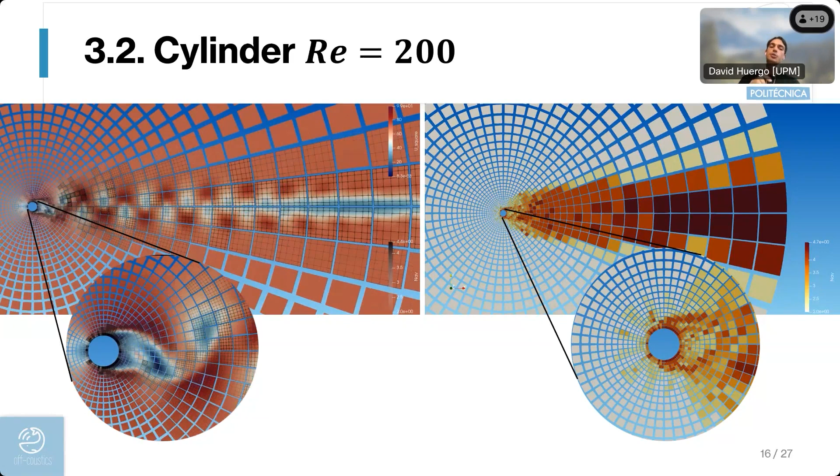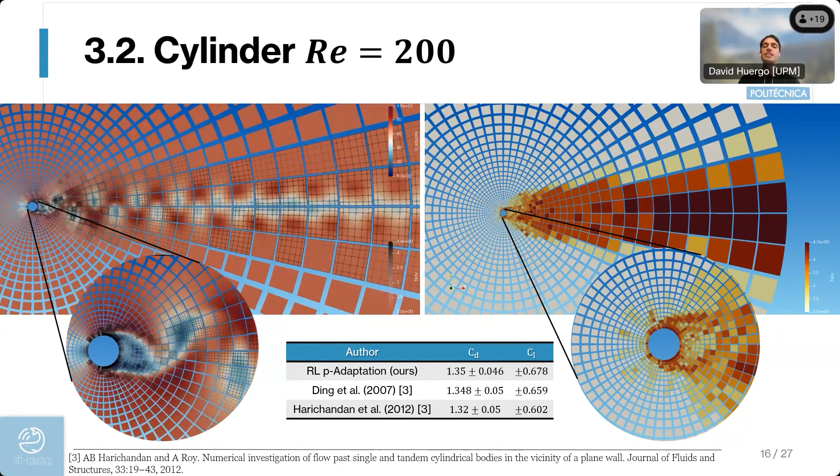On the left, you can see how this adaptation is dynamic. We are adapting all the time to capture only those regions where we have strong gradients. We compared the results for lift and drag with our approach and with different state-of-the-art solutions just to check that our method is accurate.

Then to test the laminar to turbulent transition, we run the same problem that Esteban explained before, the Taylor-Green vortex. The first row is the velocity magnitude, and the second row is the average polynomial order in each element.

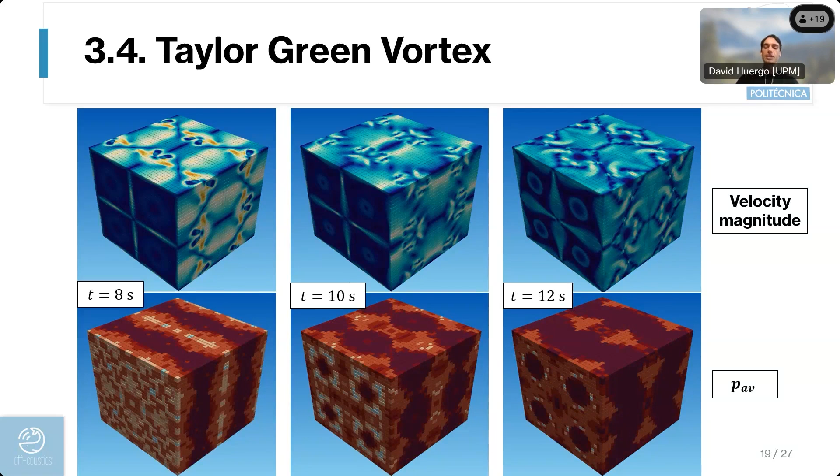As time increases, the flow field becomes more and more turbulent, and that's why the overall polynomial order is increased in the whole mesh. This behavior is represented in the figure on the left, where the average polynomial in the whole mesh progressively is increased towards the maximum polynomial order P6, because the flow field is fully turbulent.

And on the right, you have the kinetic energy rate solved with a polynomial P3, P6, p-adapted, and a DNS simulation. As you can see, the P3 is not accurate enough, but the P6 and the p-adapted simulations are almost the same, and both are very, very close to the DNS simulation.

However, to compute the P6 solution, it took around 100 hours, while the p-adapted, with the same computer, same configuration, same everything, only took 41 hours.

So to obtain almost the same result, we are saving 60% of the computational cost.

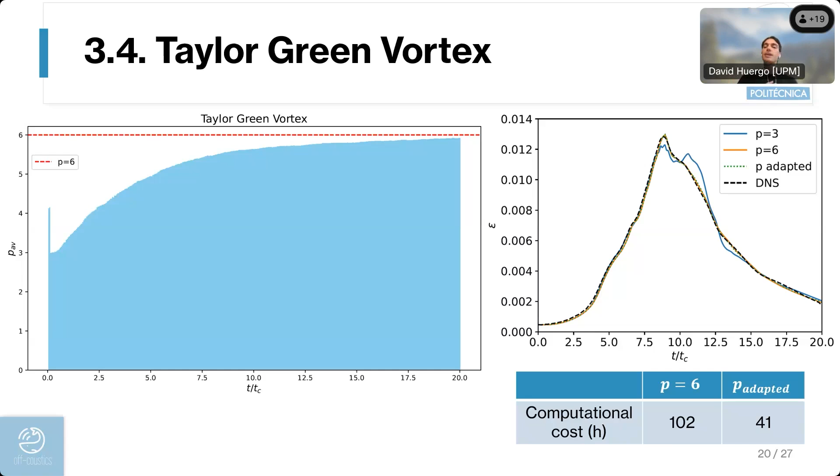I want to highlight again that for all these results, we have trained only one reinforcement learning agent, and it's the same for all the different cases. We are solving different equations, with different meshes, and of course different boundary conditions.

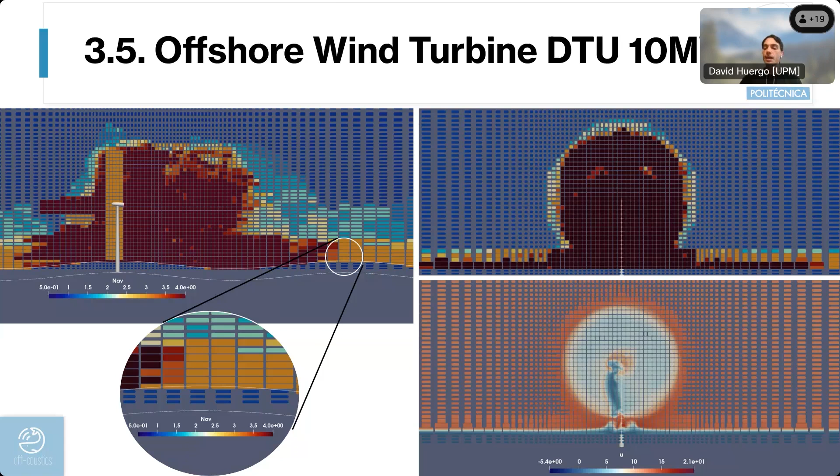In this case, the agent has highlighted that the error is higher near the actuator lines, where we have the blades, and on the no-slip wall boundary condition on the floor, because the elements are very big and we are not able to accurately capture the boundary layer. Also inside the immersed boundaries, inside the tower and the nacelle, because again the elements are very big, and inside the wake, because we have a fully turbulent flow.

So all these elements are critical, because that's where we expect to have higher errors, and the agent, without knowing almost anything, is capable of highlighting those regions and also quantifying those errors.

And well, that's all regarding the results. So what's the ongoing work on this topic?

We are working on using reinforcement learning and p-adaptation for moving immersed boundaries, also for acoustics, to increase the accuracy for those problems that are not easy. Of course, we are comparing with different state-of-the-art p-adaptation algorithms to check if our approach is better or not. And finally, we are working on dynamic load balancing to improve MPI parallelization.

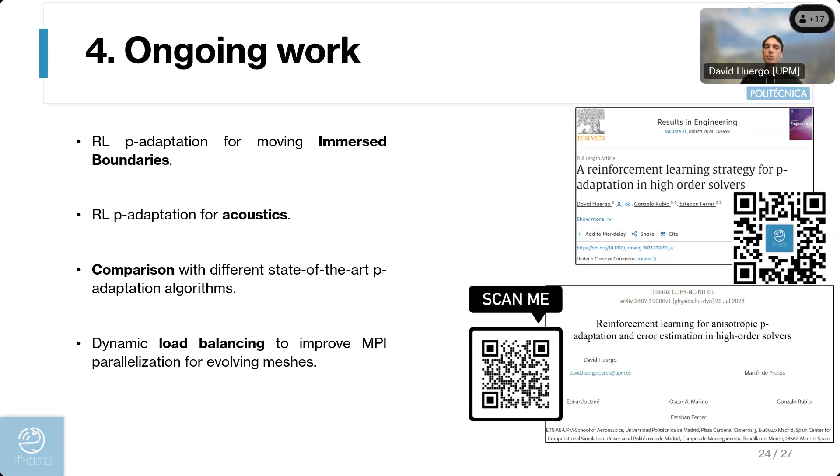And well, finally, just one more slide to conclude. First of all, we have discovered that reinforcement learning for p-adaptation leads to a very, very general approach, and it allows us to improve the accuracy while at the same time reducing the computational cost of CFD simulations.

This methodology can potentially be applied to any partial differential equation and any computational mesh, because the agent is going to adapt inside each element independently. Also, the reinforcement learning agent has to be trained only once and for all, and it is trained with one-dimensional cases, which is why the training is so fast. And as I said before, the training is also decoupled from the solver. Even though it's trained in these conditions, it's capable of adapting and accurately solving 3D turbulent simulations.

And finally, with this approach, we are able to provide a very, very cheap estimation of the spatial error in each element of the mesh.

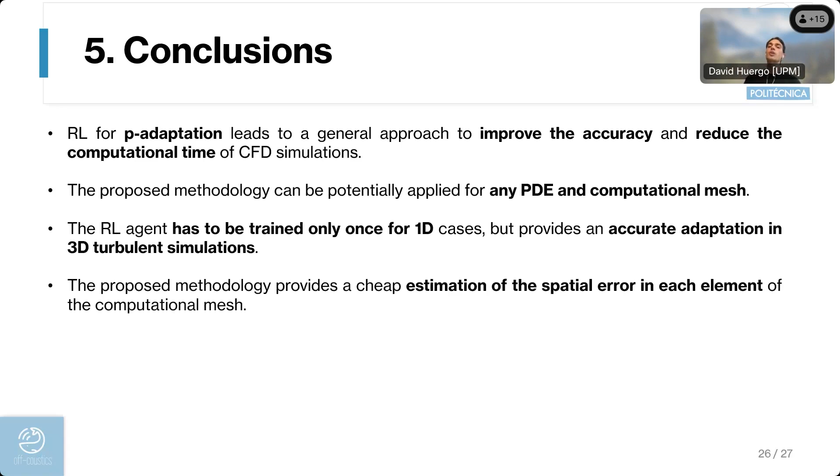So, as a final remark, we can say that reinforcement learning can be applied to minimize manual intervention, to improve the accuracy of numerical simulations, and finally to speed up your CFD code.